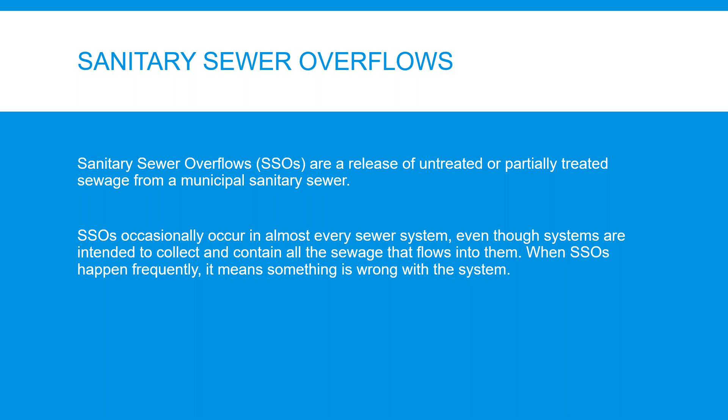Some of the causes of sewer system overflows—perhaps one of the biggest reasons—is inappropriate materials sent to the sewers, such as fats, oils, and grease, and some household products, including some marked as flushable.

Tree roots entering through defects or openings in a sewer line may also cause blockages. Leaking sewers, stormwater, groundwater, and snow melt entering the sanitary sewer from cracks and faults in the sewer or leaky sewer joints can overload a sanitary sewer.

Inappropriate connections of water, such as sump pumps, roof leaders, foundation drains, and area drains, can overload a sanitary sewer as well.

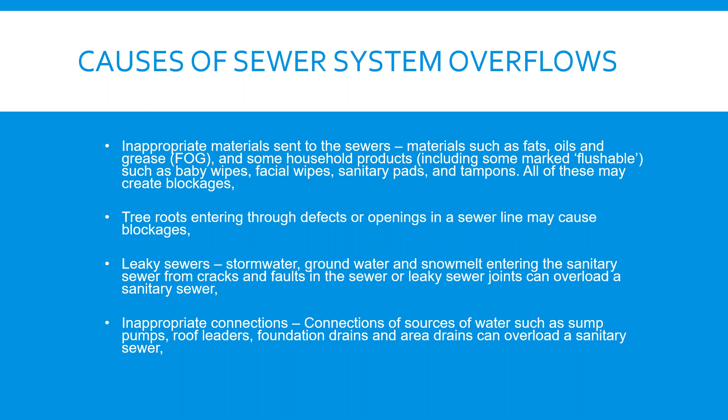Improper or inadequate maintenance and cleaning of sewers, inadequate pump maintenance and lack of backup power, undersized sewers and/or pumps, and equipment failures can all lead to sewer system overflows.

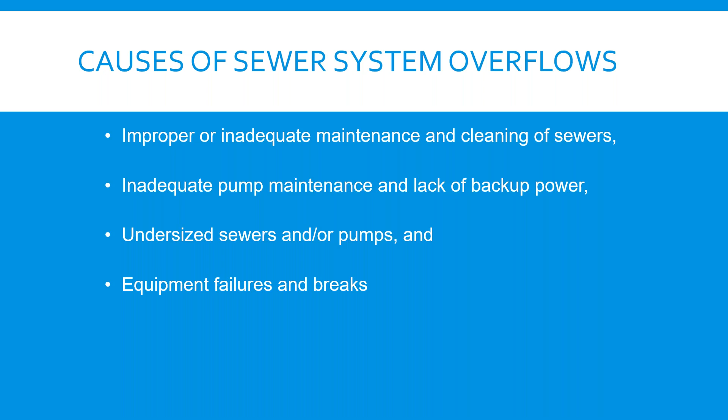During today's presentation, we're going to provide training on the safe and effective operation and maintenance of wastewater collection systems. Although the wastewater profession is not normally categorized as a health profession, few could argue the impact of the decisions we make daily on the health and well-being of our communities. It thus becomes paramount that our collective efforts result in safe and effective operations.

We're also going to discuss issues to train operators in the practical aspects of wastewater collection system operation and maintenance, as well as focus on the knowledge and skills operators need to identify system problems and select appropriate methods to solve them.

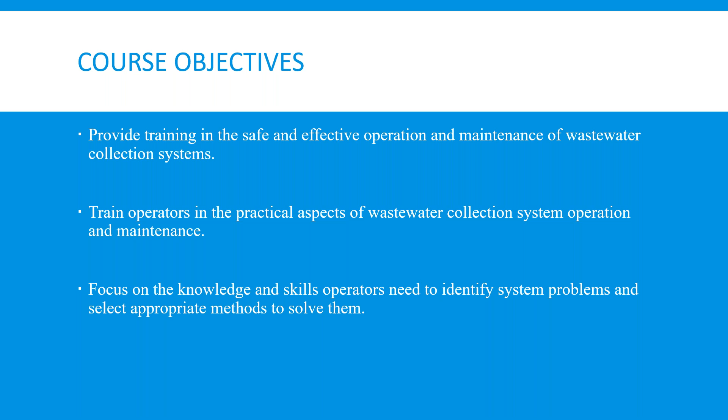Maintaining wastewater collection infrastructure, which consists of pump stations, force mains, and sewers, is an integral component of the proper management of a treatment system and critical to preventing illegal wastewater releases. Effective operation and maintenance programs have been shown to significantly reduce the frequency and volume of untreated sewage discharges, help communities plan for the future, and save money on emergency response.

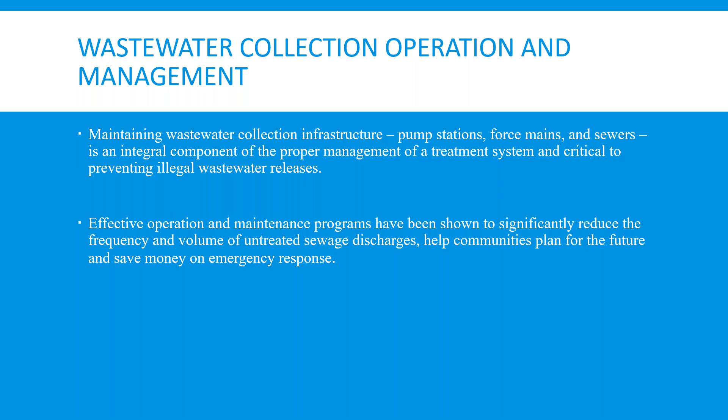The quality of the operation and maintenance of a wastewater collection system depends on effective operation and maintenance of numerous elements involved in such a program. This will assure an operation and maintenance program that will keep a wastewater collection system functioning at its top efficiency, maximize its useful life, and minimize costs.

The benefits of a proper wastewater operation and management plan: communicate with and educate citizens and local officials, address financial and regulatory needs, develop and conduct preventive maintenance programs, better manage infrastructure assets, improve system capacity, and address sewer system overflows.

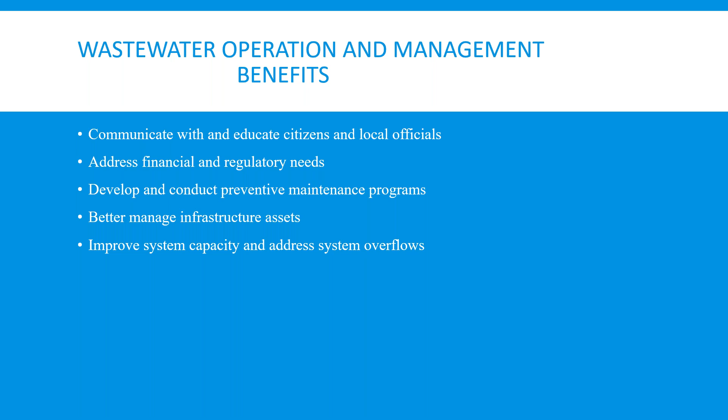Historically, municipalities have used two major types of sewer systems: combined systems, combined sewers, and separate sanitary sewers. Combined sewers are designed to collect both sanitary sewage and stormwater runoff in a single pipe system. State and local authorities generally have not allowed the construction of a new combined sewer system since the first half of the 20th century.

Separate sanitary sewers, the other major type of domestic sewer design, also known as a separate sanitary sewer, are installed to collect wastewater only and do not provide widespread drainage for the large amounts of runoff from rain events. Sanitary sewers are typically built with some allowance for higher flows that occur when excess water enters the collection system during storm events.

What is a wastewater collection system? A wastewater collection system is a series of pipes and devices that includes main lines, manholes, lift stations, and private laterals that transport wastewater from homes, businesses, and industries to a central treatment facility.

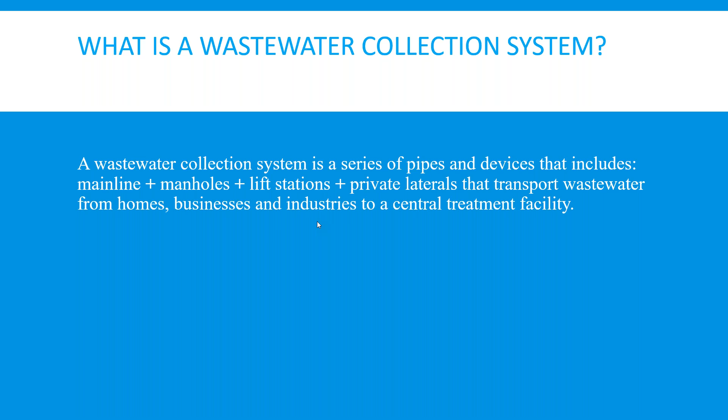Collection system O&M is an essential element of wastewater treatment. Effective inspection, cleaning, and rehabilitation are key processes for optimizing the proper functioning of a collection system. Just like your car, it will eventually fail to perform without regular maintenance and repairs.

So what O&M tasks should we be doing? Studies have shown that optimizing collection system performance depends on specific maintenance tasks and frequencies. You should summarize and review your maintenance activities each year. These practices are the foundation for not only building, but also sustaining the technical, managerial, and financial capacity of wastewater.

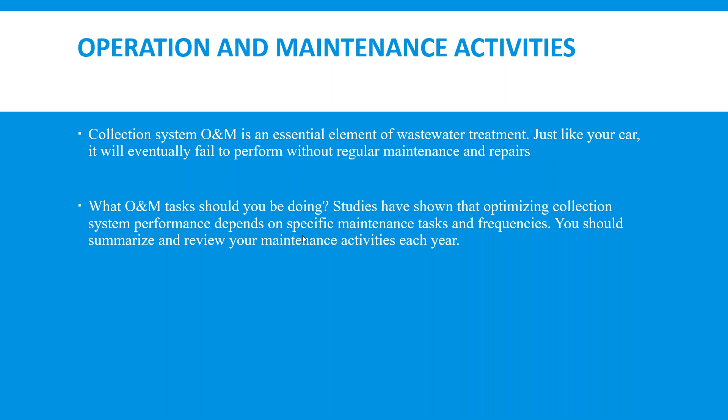Do you know the condition of your sewers? Condition assessment of your collection system is an investment in managing risk. Knowing the structural condition of your underground assets will allow you to avoid emergencies, prioritize repair and replacement projects, and plan for the future.

Maintenance issues are the leading cause of backups and overflows of collection systems. Condition assessment helps utilities discover maintenance and capacity issues before they become maintenance problems. Knowing how your collection system really works will identify trouble spots and lead to preventive maintenance decisions rather than being reactive to the consequences of emergency incidents.

Implementing a proactive program based on information and systematic assessment provides a manager with the tools to improve decision making and solid information on which to base staffing and funding decisions.

Why perform a condition assessment? The compelling reason to perform a condition assessment of your collection system is to preserve the existing valuable infrastructure, minimize O&M, and avoid emergencies and unexpected costs. Performing a condition assessment has a cost, but prioritizing work by focusing on critical assets, and the maintenance and replacement needs for your collection system is an essential step towards better management.

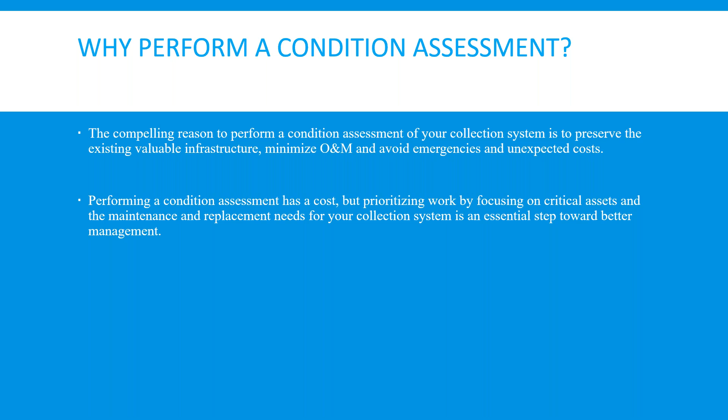Structural assessment. If a sewer pipe is about to fail and you don't know about it, is that a problem? Structural problems can cause major headaches. Structural problems in wastewater collection systems can be caused by various factors such as cracks, faulty seals, and/or improper connections.

Wastewater collection systems are also subject to aggressive chemical environments that can cause corrosion and deterioration of concrete and steel infrastructure over time, all of which can result in infiltration and inflow into the system during wet weather, which could result in overflows and operational problems at wastewater treatment facilities.

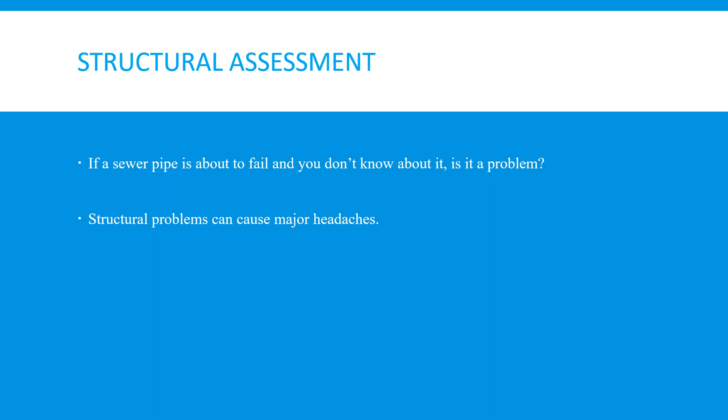Hydraulic assessment. Hydraulic capacity is a primary performance measure for a wastewater collection system. Capacity, both hydraulic and treatment, can be taken up by clean water entering the sewer collection system. Too much flow or constricted areas in sanitary sewer pipes can cause overflows or backups of wastewater into homes and businesses.

Overflows and backups of untreated wastewater may spread disease and cause environmental damage. It may be obvious based on dry weather and wet weather flows that rainwater or groundwater inflow or infiltration, I&I, is a problem. Excess groundwater and rainwater can enter the collection system from cracks and holes in sewers and manhole covers. Illicit discharges of cooling water and illegal plumbing connections can also create flows which exceed the capacity of the sanitary sewer pipe.

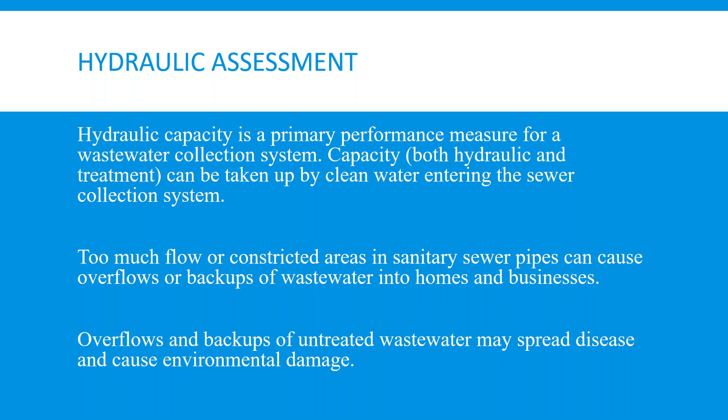Preventive maintenance program. A preventive maintenance program is designed to help communities document knowledge as well as better understand their collection system. And by knowing the condition and critical areas of their collection system, a community can improve operations and implement preventive maintenance practices to help reduce or eliminate sanitary sewer overflows, or SSOs.

A good preventive maintenance program is key to keeping a wastewater collection system in good repair. It helps preserve capital investment while preventing service interruptions and the excessive infiltration inflow and system failures that can result in sanitary sewer overflows.

Unfortunately, in many cases, wastewater collection systems have fallen victim to the out of sight, out of mind syndrome. Far too often in the wastewater collection system only becomes a priority when a problem arises. However, with good records, regular analysis of these records, and use of this information, we can produce a cost-effective preventive maintenance program.

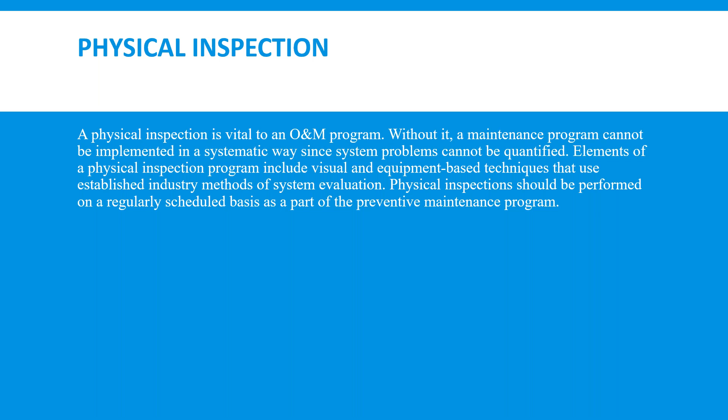Inspection provides a detailed inventory of the system that includes size, material, condition, line sags, joint types, elevations, slopes, location of manholes and pump stations, location of building lateral connections, and other system attributes that are necessary for managing the entire O&M program.

Inspection data provide location information that allows more efficient O&M planning and scheduling and emergency response. During stoppages that involve overflows and/or backups, valuable time is lost if location information is not available, increasing the risk of regulatory violations, property and environmental damage, and threats to public health and safety.

Inspection provides the data necessary for managers to make informed decisions on all maintenance, repair, and rehabilitation actions. This results in an O&M program that is effective and efficient.

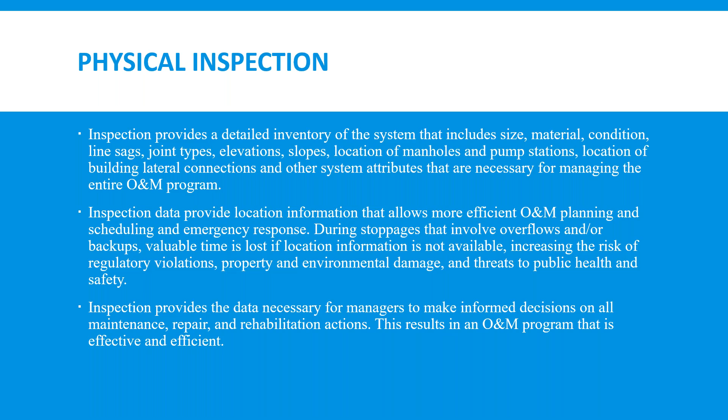Purpose of conducting inspections: Identify what is in the system inventory. What size pipes do you have? What type material? In what condition are the pipes? Identify the location of the system's components. Are there any areas subject to stormwater runoff or any lines crossing creeks or streams?

Determine the condition of the components. Are maintenance records available? And customer work orders? Are customer work orders available? Do these records indicate problem areas? Finally, prevent problems from developing.

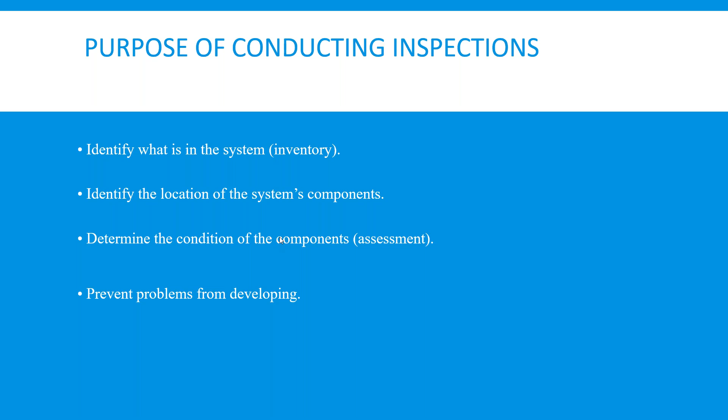Benefits of physical inspection.

Physical inspections are performed to accomplish the following goals: identify defects in the system that can contribute to or cause backups, overflows, and bypasses; identify chronic problem areas so maintenance can be planned and scheduled; identify defects that, if not fixed, will result in a future failure; determine the system needs for long-term replacement and rehabilitation; and assist in setting and justifying realistic user charges.

In reference to setting and justifying realistic user charges, most collection system improvement projects are funded by various federal and state agencies. Unfortunately, these funds tend to be overwhelmingly loan funds with little to no grant. This means utilities must rely on the adequacy of their rate structure and the revenues it generates to fund these projects, which often results in a rate increase to the consumer.

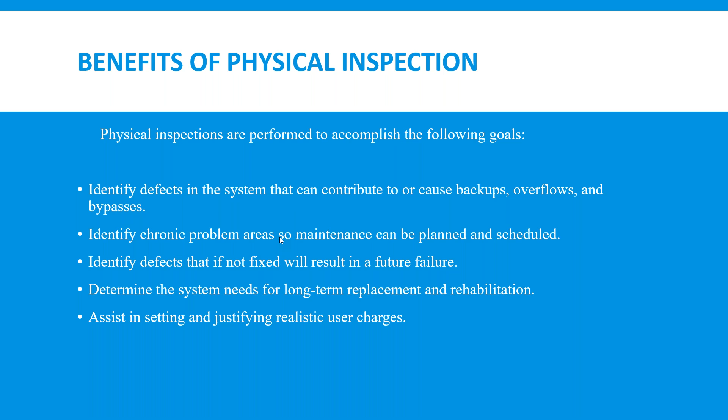A smoke test is a sewer inspection in which a non-toxic smoke approved by the public health agency is blown into manholes. The smoke makes its way through all of the connected pipes in the sanitary sewer, helping to locate pipe leaks, broken manholes, cracks, uncapped lines, and more.

Smoke testing is a relatively simple process which consists of blowing smoke mixed with larger volumes of air into the sanitary sewer line. Usually induced through the manhole, the smoke travels the path of least resistance and quickly shows up at sites that allow surface water inflow. Smoke will identify broken manholes, illegal connections, uncapped lines, and will even show cracked mains and laterals, providing there is a passageway for the smoke to travel to the surface.

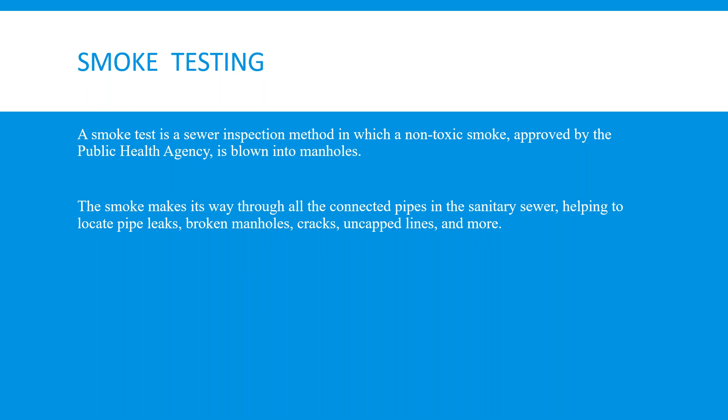CCTV, closed circuit television.

CCTV evaluation can determine the specific location and cause of I&I in many cases. However, flow data gathered by flow meters has been used to guide sewer system capacity and management for decades. Flow data can be used as a tool in condition assessment, either to identify areas for further CCTV inspection or to quantify the severity of I&I identified during CCTV work.

Any components of the system located along streams are particularly vulnerable to the effects of rainstorms. Each sewer crossing of a stream should be inspected to be sure the sewer is not in danger of being broken. Also, the manholes on each side of the stream should be checked to see that no excess flow is taking place, which would indicate a leaking sewer under the stream. Since these sewers are often in remote locations, they are susceptible to vandalism and can overflow for long periods of time without detection.

CCTV inspection is generally used in one of two scenarios. The first scenario is where there is a sewer line that needs to be inspected for potential repairs. The second scenario is when there is a sewer line that has already been repaired and the inspection is being done to ensure that the repairs were effective.

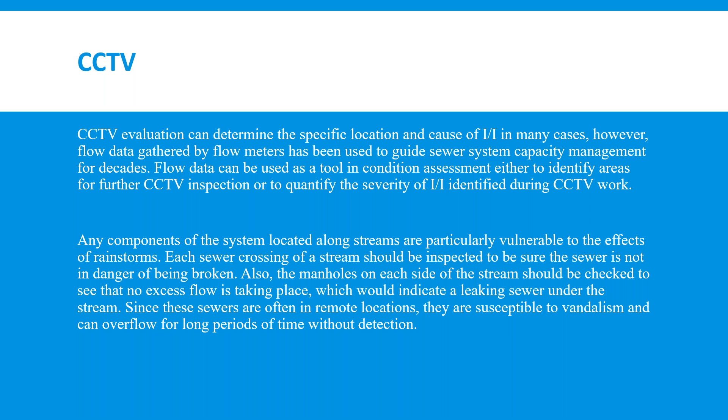Flow monitoring equipment is used to identify areas of the collection system that have rainwater inflow or groundwater infiltration problems. Flow monitoring can also detect areas where surcharging may occur because the volume of wastewater to be carried is greater than the capacity of the sanitary sewers to convey that amount of flow. Surcharging problems can result in sanitary sewer overflows when wastewater rises to the top of the manhole and flows onto the street or to the ground.

Flow meters are placed at varying locations throughout the collection system. These meters measure the amount and rate of wastewater flow in the sanitary sewer lines. The monitors are left in place for a specified period of time. Data is collected and compared to rainfall amounts over the same period. Measurements taken before and after a rainfall event indicate how much I&I contribute to the total flow of wastewater in the collection system.

Flow monitoring is an essential procedure to collect data for evaluating and characterizing wet weather and dry weather flow conditions in sanitary sewer collection systems. While many do not have flow monitoring equipment within their collection system, there is certainly flow measuring capability at the treatment facility with which dry weather versus wet weather flows can and should be analyzed.

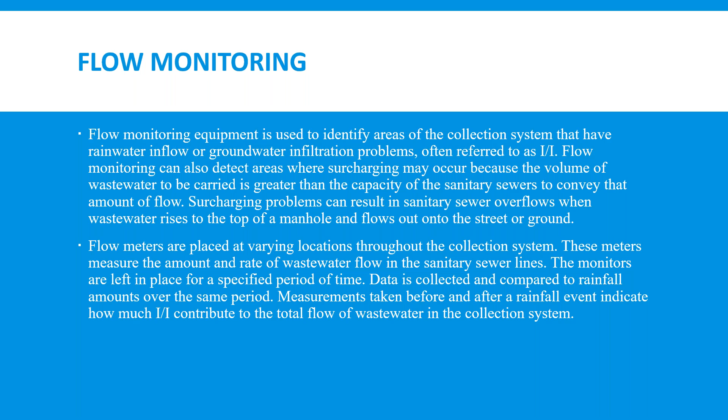Manhole inspections. Visual and televised inspections verify that manholes and cleanouts are on proper grade and are accessible to maintain sewer lines. Sewer line maps, which indicate distances to fixed objects such as hydrants, telephone poles, streetlights, etc., from installed manholes, can be used to locate manholes or cleanouts that are paved over or concealed. Manhole inspections are a relatively quick and inexpensive way to detect holes and leaks that allow rainwater or groundwater to enter the collection system.

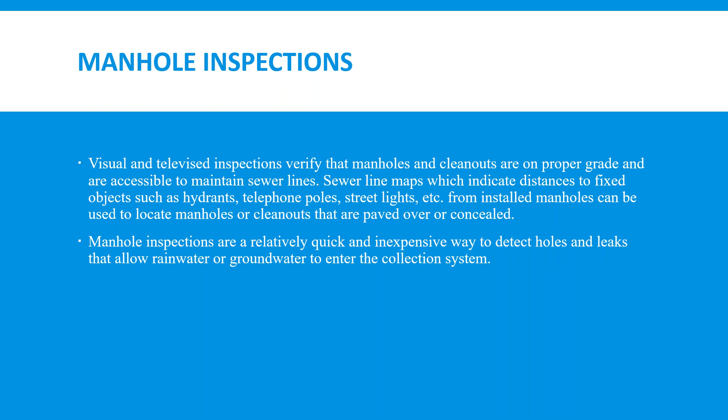Manhole inspections should include the exact location of the manhole, the need for any grade adjustments, leaks or holes in the cover or frame, evidence of rainwater ponding on the manhole cover, and the condition of sewer pipes and lateral connections.

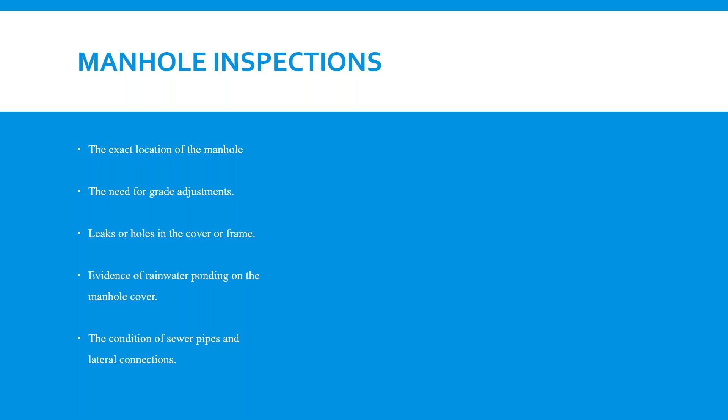Lift station inspections. A lift station is an installation of pumps that raise wastewater from areas too low to drain by gravity into sanitary sewers. A typical weekly lift station inspection should include observations that confirm alarm systems are operating properly.

That alarm system could be an audible alarm, or in many cases, a visual flashing alarm. Wet well levels are properly set. All indicator lights and voltage readings are within acceptable limits.

These are all tools at the disposal of the operator that should be utilized in performing routine maintenance, operation and maintenance on a sewage lift station. Are the pumps running without excessive heat or vibration? Do they have the required amount of lubrication? Do the belts show any sign of excessive wear? These are all things that should be documented, maintained, and reviewed regularly to prevent issues and to ensure the continued operation of the lift station.

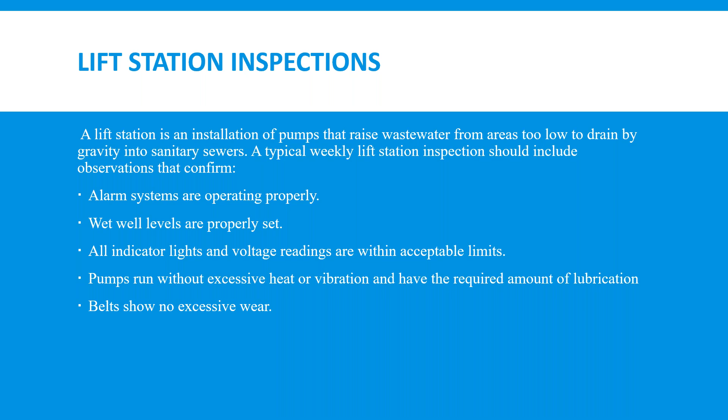Sewer laterals. The sewer lateral is an essential component of a wastewater collection system. This plumbing system component ensures that waste from your home is safely discharged to the sewer main. A utility should not neglect problems with sewer laterals, as there can be significant problems on laterals that negatively impact the operation and maintenance of the collection system. These problems can be identified through efforts such as smoke testing, CCTVing, and customer work orders.

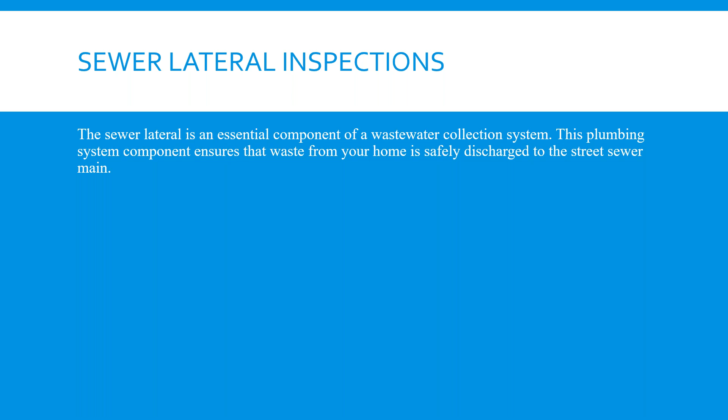No discussion on sewer collection systems can be complete without also considering the hazards of the occupation. There have been many things we have discussed during this presentation that would require the operator to come in close proximity with many dangerous chemicals and devices.

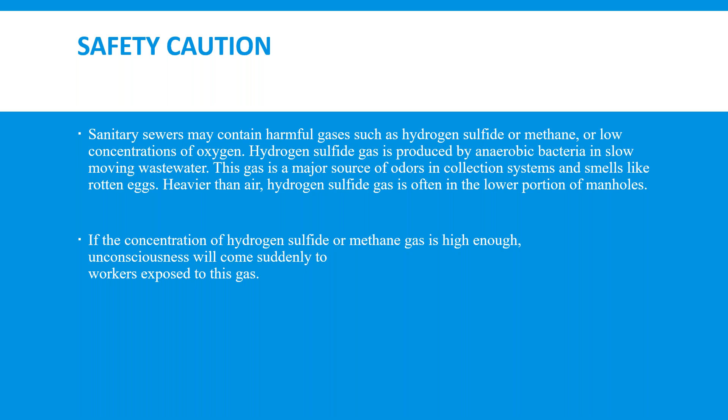Sanitary sewers may contain harmful gases such as hydrogen sulfide or methane, or low concentrations of oxygen. Hydrogen sulfide gas is produced by anaerobic bacteria in slow-moving wastewater. This gas is a major source of odors in collection systems and smells like rotten eggs. Heavier than air, hydrogen sulfide gas is often found in the lower portion of manholes. If the concentration of hydrogen sulfide or methane gas is high enough, unconsciousness will come suddenly to workers exposed to this gas.

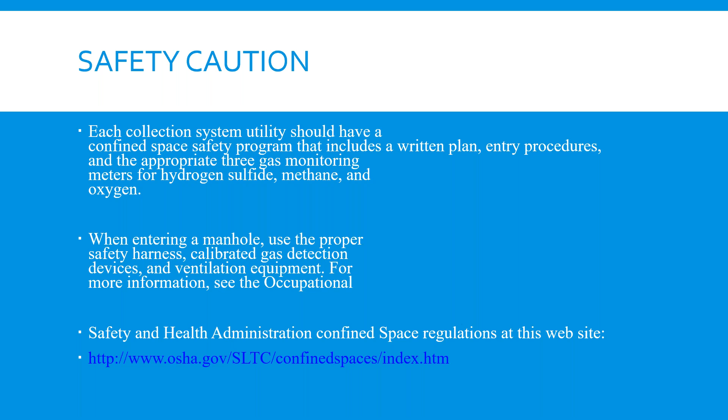In conclusion, while we recognize that a certain approach may not be directly applicable to every situation, we hope it might provide a new idea, a useful template, or perhaps a potential contact as you work to prevent overflows and improve your collection system. This is the end of my presentation, and I thank you.

Awesome. Thank you, KT. So we do have a couple of questions for you. Okay. This one came in at the beginning of the presentation. Pascal wants to know how smoke testing works. How does smoke testing work?

Yes, okay. So as stated during the presentation, smoke testing is utilized in order to find places, cracks in the lines, places where stormwater, rainwater, infiltration, groundwater is entering into the system. There are a number of ways of doing this. One of the most common is with a non-hazardous oil and a blower. Imagine placing this blower, which is a huge fan, on top of a manhole, and we apply this oil to the blower, and the heat from the blower creates smoke.